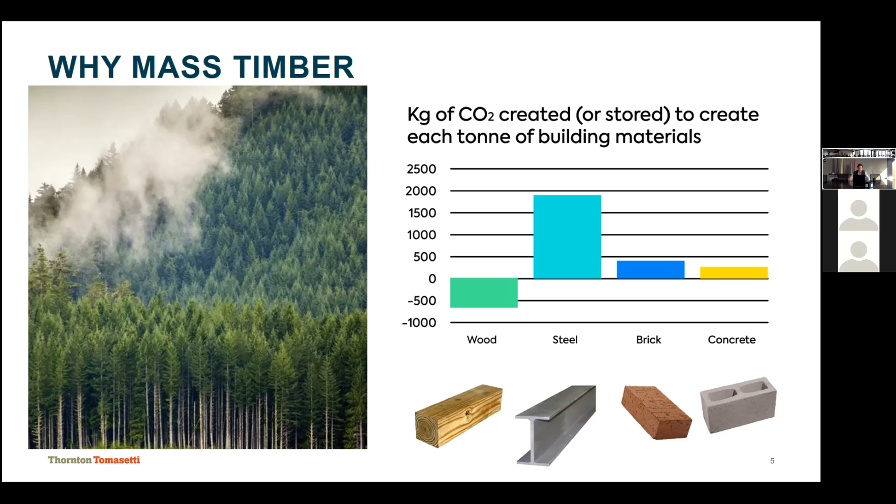So having other materials is always great, but also in the context of meeting the targets that the architecture and construction industry have set ourselves, and trying to reduce the amount of CO2 emissions on the planet. Wood is an incredible material because not only does its fabrication process have smaller emissions than traditional materials such as steel, brick, or concrete, but it actually captures CO2 during construction. And there may be some discussions about when this CO2 is going to be released, but as an industry right now, we have established some very short targets for 2040. So having tools that help us achieve these short-term goals is incredibly important.

Having this as part of the structure is also very important because when you look at the total embodied carbon in a building, about 70% of it is actually embedded in the structure. So if we are able to reduce these very large numbers, that's a huge success.

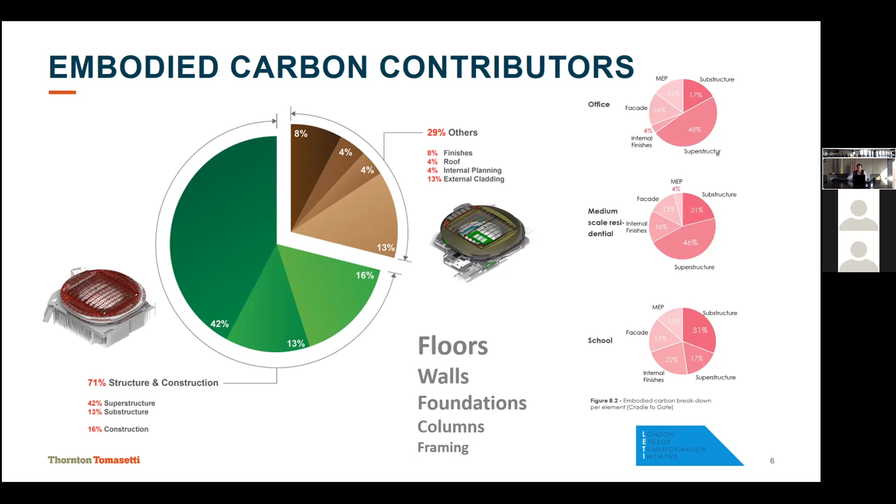Now, just in case you guys are not familiar with mass timber, what I'm talking about here are products that are composed of laminations of different sizes of timber. Traditional timber construction is more like stick framing, which is 2x4s, 2x6s, 2x8s, and they are nailed together to form houses. Now, when we're talking about mass timber, we're actually taking these pieces of timber and gluing them together, nailing them together, or mechanically joining them together to create these bigger pieces.

Now, because we're creating bigger columns, beams, or slabs, the performance of this material is very different from what we're used to in traditional timber construction. And then we can achieve buildings that are bigger than what would be allowed by traditional timber construction.

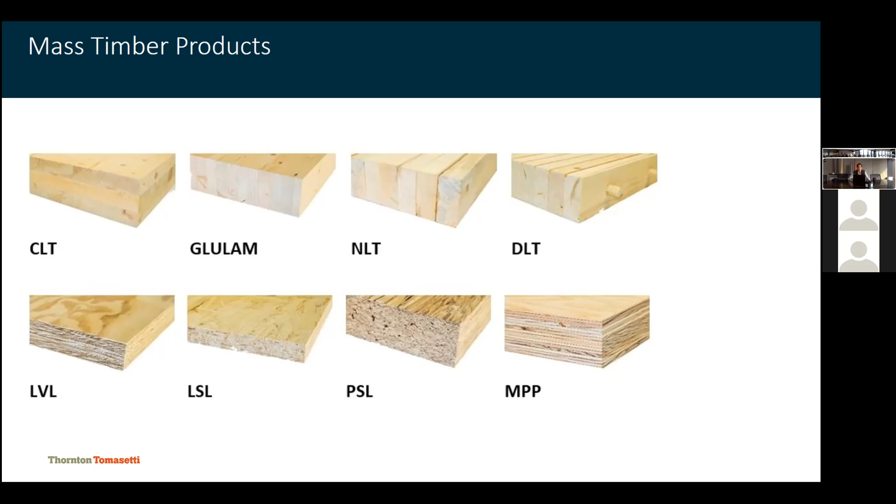Here's an example of how we are building that. It's actually not technically mass timber, but we think it's interesting. This is a Wisconsin manufacturer that harvests full trees and creates the structure out of a single tree member.

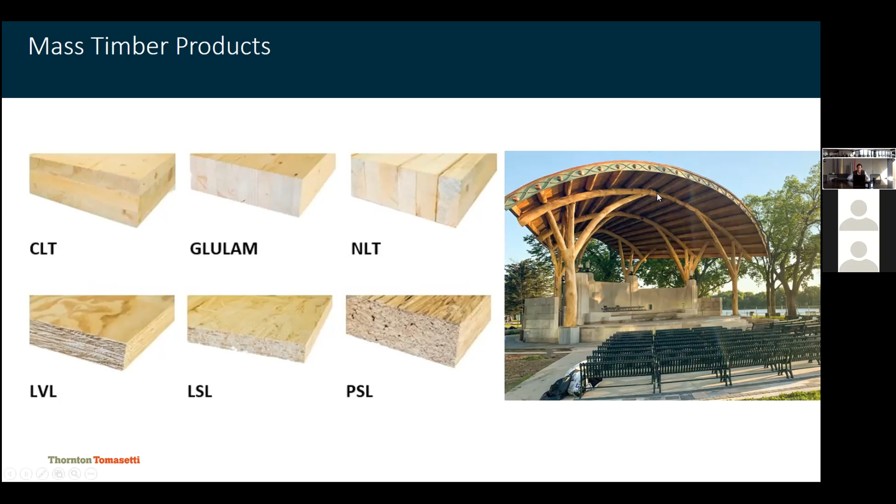Now, mostly today, I'll be showing you images of glulam beams and CLT slabs. Glulam beams or columns, you basically just stack them in one direction, one on top of the other. It's about 1.5 inch laminations, and they are stacked on top of each other.

In the CLT, what we do is we cross them 90 degrees between layers. By doing that you first get like a two-way behavior, but also, wood tends to shrink over time. Wood doesn't shrink too much in the direction of the fibers, but it changes volume more significantly in the direction perpendicular to the fibers. So by creating this secondary layer perpendicular to the main layers, we're able to constrain those movements that are natural in wood.

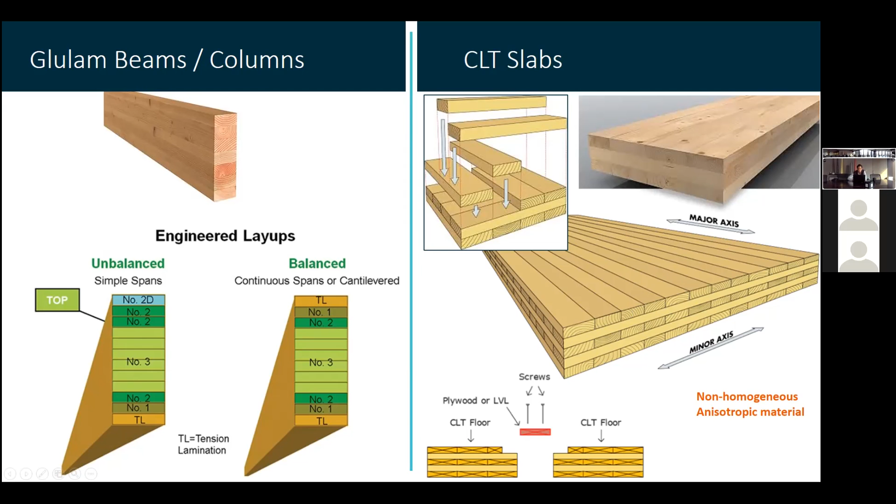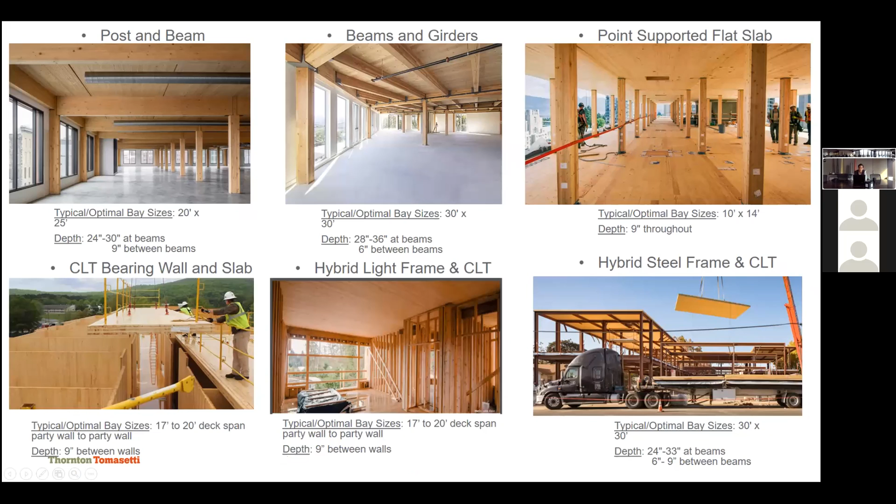And just to show you a few images of what is possible with wood, there are different systems currently being utilized. We have post and beam construction, where you have a glulam column with glulam beams on top, and then the CLT slabs above. You can introduce a girder and just have joists, so your beams are more closely spaced, and the CLT slab becomes smaller. Or you can actually remove all the beams and just have the CLT supported on top of the columns.

Now, when you're doing that, you're gonna end up with columns very closely spaced. So different buildings will require different things. You can also use your CLT not only as floors, but also as walls, and just bear on these CLT walls. This is pretty typical in Europe, perhaps not so much here in the States for now, but you'll see it will happen more and more.

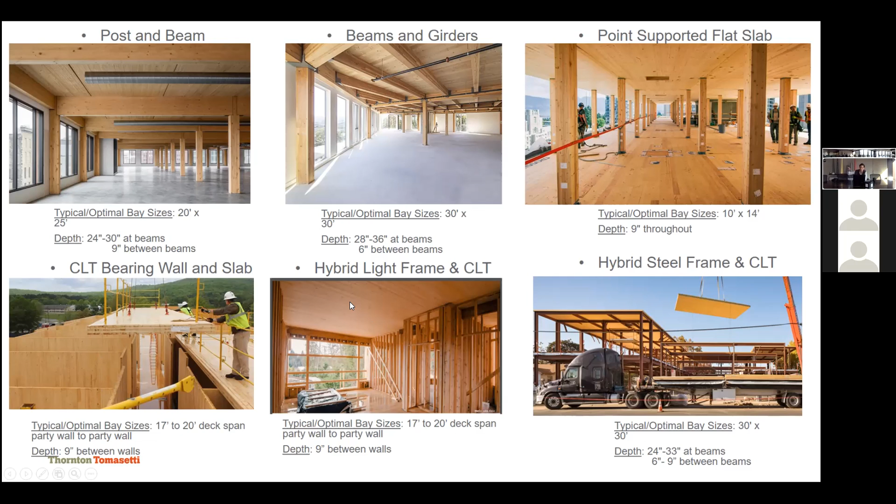And then there is a mix between old and new, which is stick framing. It's using these traditional stick elements, and then just using the CLT for the floors. All this would be concealed in gypsum, but the CLT gets exposed. And now we're seeing a trend, which is mixing materials. You can either mix it with steel or with concrete, and especially as we go into taller buildings, it may start making sense.

Now, the magic thing with timber is that it creates this char layer on the exterior, and the char protects the interior. So in the interior of the element, you keep your structural properties almost untouched. And then all you have to do is understand how long the fire is going to be, or for how long you want your protection to be, and make sure you have enough wood around the structural part that you need for the fire case to sustain the loads. And that's something that is very well known.

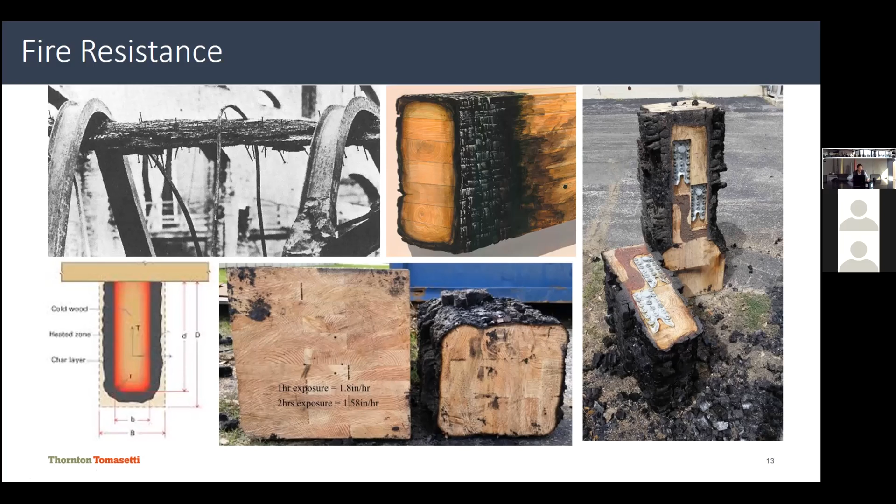So going back to Chicago now, how this became possible. This is going back to 2017, when the tallest mass timber building in the US was 7 stories tall. In Europe, they had taller buildings, probably more in the range of 12, 14 stories at that moment.

And the University of Cambridge had a significant amount of funding, and they were trying to figure out what to use that funding for. So they reached out to a number of architectural and structural companies and asked us to design high-rise mass timber buildings, not with the target of building them, but to explore the possibilities of the material, and most importantly, to identify where the limits of the technology were at the time. So that's why they asked us to design this 800 feet tall, 80-story mass timber building.

Perkins and Will at the time, they were working on the development of all these lots around the river. This is like the south part of Chicago. So we decided, okay, we'll use that site as our case study, and we'll develop this building over there.

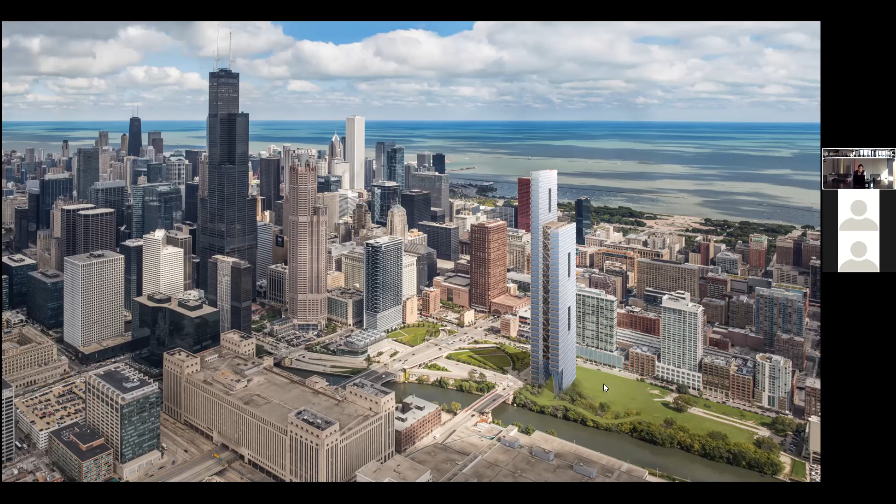Now, to pick a case study, we start with a traditional building where you have a corridor in the center and you have units on both sides. Now, structurally, the most efficient thing you can do is always put the structure on the exterior of the building to resist the wind forces, which is what becomes controlling for a tall building.

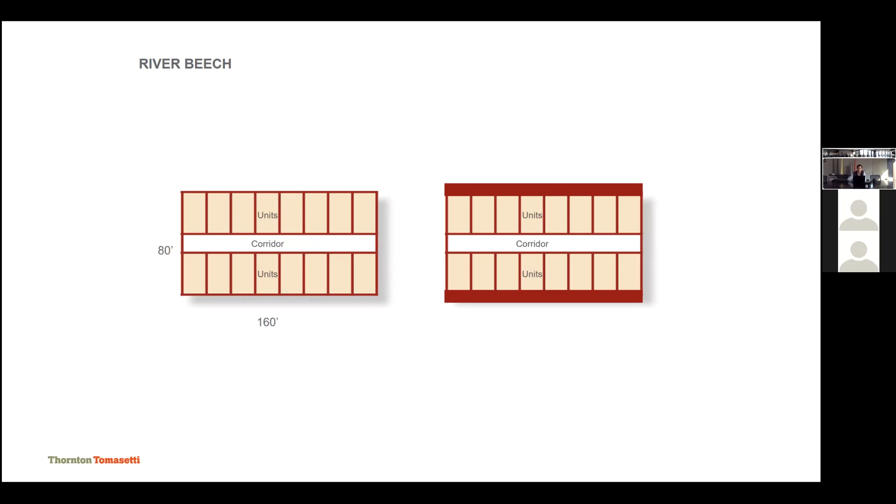So if you're doing a small building, then where your columns are, where your walls are, that's the important part. Once you go into all these very tall buildings, the big concern always is, how am I going to resist all the wind forces? How am I going to resist the seismic forces? We're in Chicago, so actually we don't have significant seismic forces, but as you know, Chicago is the windy city, so wind is a very big concern up here.

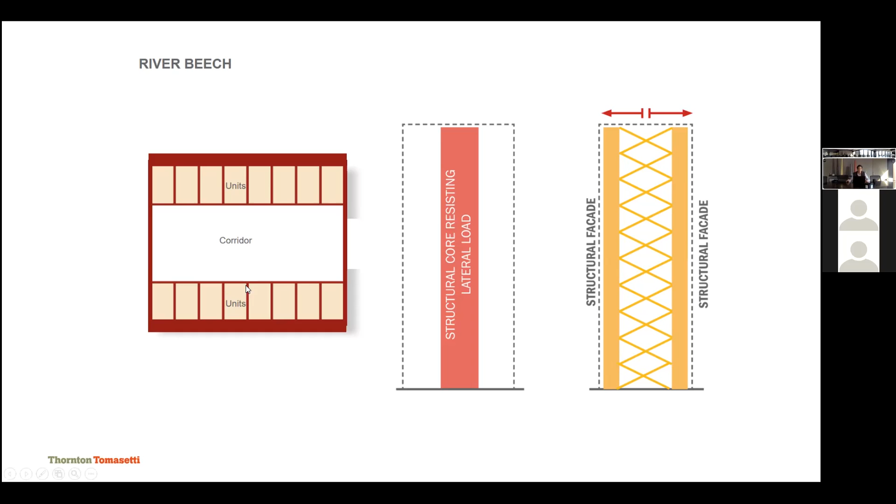So if you're trying to have the most efficient structure, then what you want to do is actually push the building out. So not only did we push the structure to the facade of the building, but we actually split the two units into two different buildings in an aim to gain on the depth of our system and make it more efficient. Then at that point, we had kind of like a diagram system.

We were discussing with the architect, okay, architecture, you want to maximize the views, you want to create very rectangular openings. However, for forces, it's hard to flow around a corner. And when designing with a material, it's very important to understand how the material works better. Wood connections are very easy to do when you're trying to do axial forces, when you're trying to push one piece against the other. But it's much harder when you're trying to transfer bending through the connection.

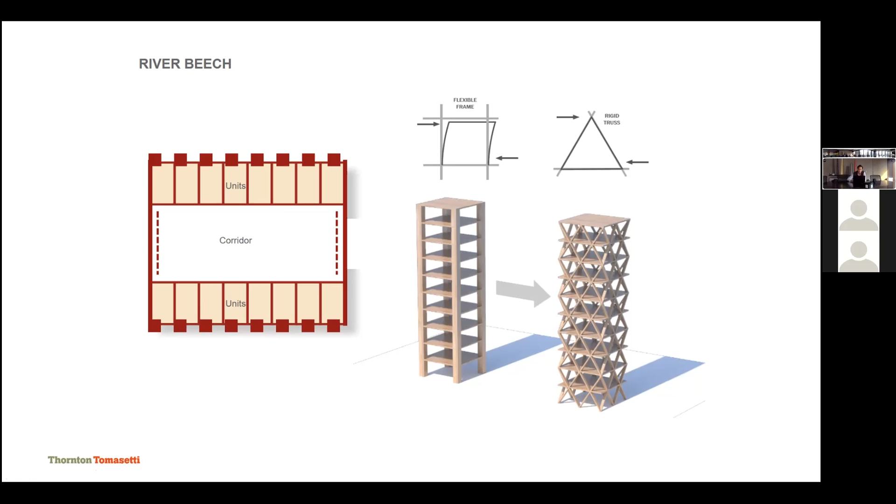So what we did is we actually diagonalized all our diagrid to simplify our connections, and we have a much more efficient structure. And through multiple iterations, we ended up with the building on the right, which had 2 towers with a diagrid on the facades. The diagrid was conceived as LVL, laminated veneer lumber. So basically, you peel a trunk and you glue the laminations to each other, and then each of the 2 bars of the building was joined by a glulam diagrid in the middle.

So at the end, you can imagine this building bending, and when it bends, the diagrid gets engaged and transfers the forces from one building to the other, creating a very efficient structure. Now, the other thing that the diagrid gave us: wood is a great material, but compared with steel or concrete, its capacity is smaller. So once you go into a very tall building, you may end up with very large column sizes.

Now, by creating this diagrid, we were able to distribute all that area that we needed to support the building into many different members. So each of these becomes like a smaller column that in total becomes a large area of wood, but it doesn't have a big impact on the architecture of the building.

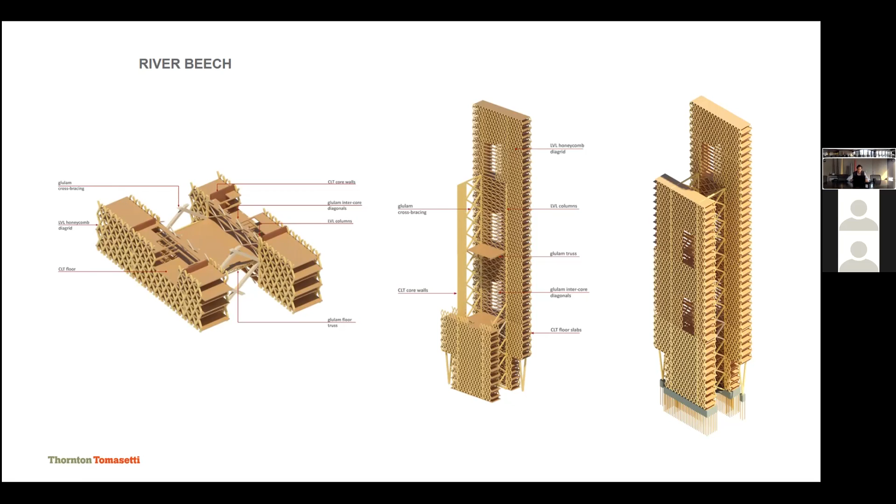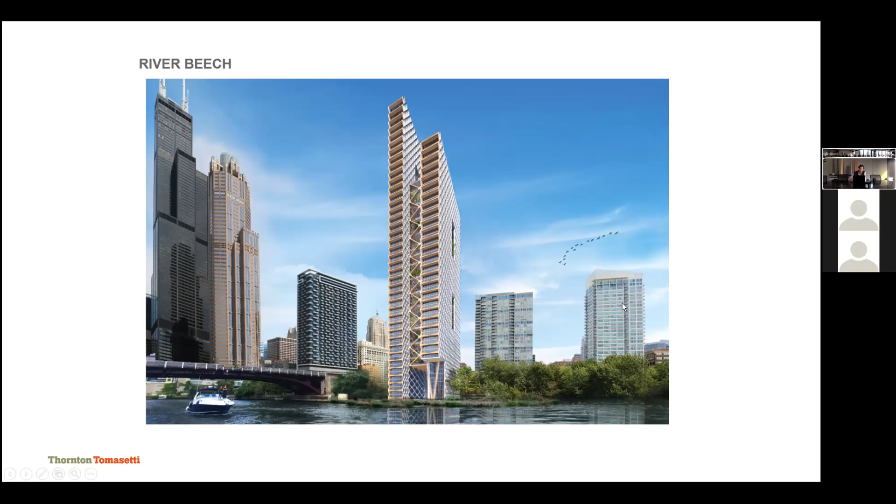So if I give you some architectural renders from Perkins and Will, you can see here the 2 buildings with that intermediate space. Now, what that intermediate space allowed us was to create a great atrium for public functions. You can see the diagrid view from below with some intermediate spaces. That's another advantage of the diagrid: because you have all these members, you can start creating openings, because the diagrid will just transfer the forces around it through all the members.

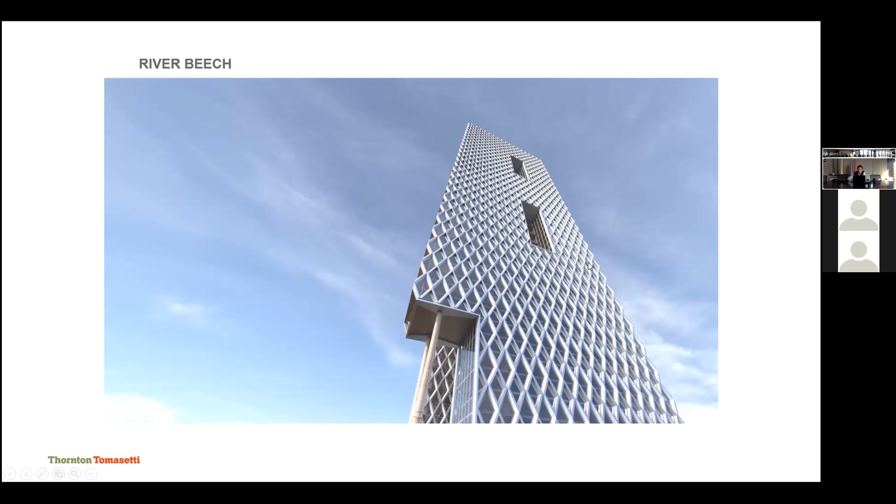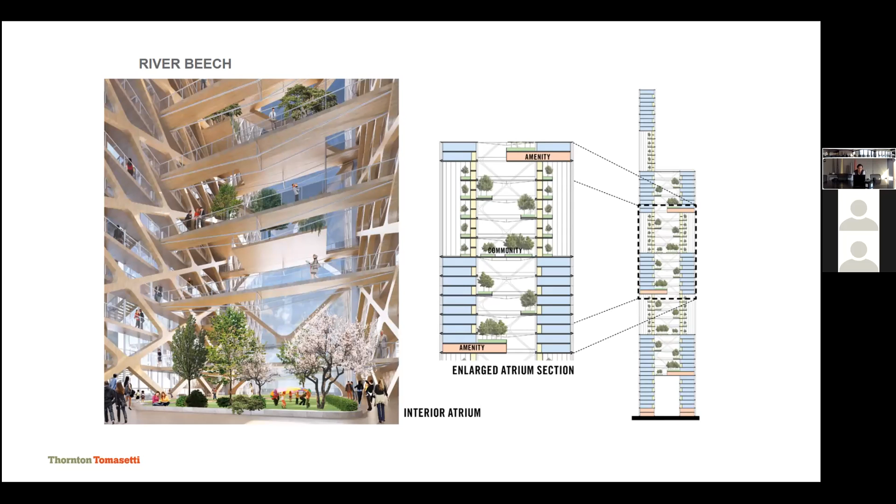And here are these atriums that were created in the interior, and you can see the beauty of these atriums, having the wood exposed. It really creates a very unique space, very different from what we're used to.

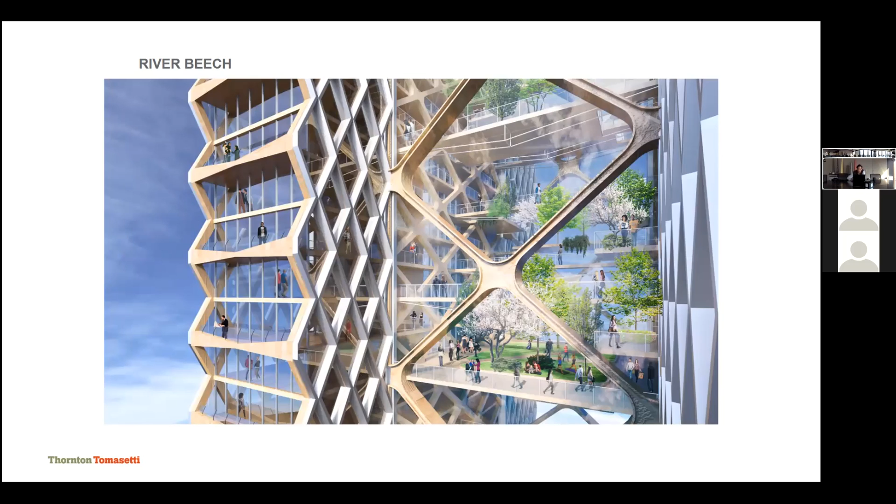Another image of the atrium, and then the spaces within the unit, and this idea that you really feel in a natural environment. I don't know if you guys have had a chance to walk into a mass timber building, but one very common reaction when you go into a mass timber building is the first thing you want to do is touch a column, touch a wall, whatever you can to experience this member, this environment, and it's very unique.

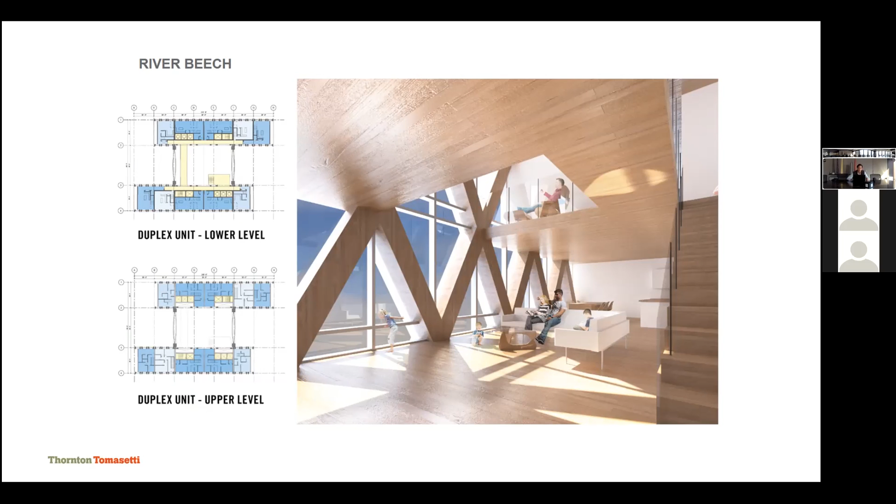So you see some more images. Now, the other advantage of mass timber is it allows for a lot of prefabrication, and its weight is 1/3 of the weight of concrete. So you can prefabricate much larger elements. So one key thing of this project also was to define how these modules were going to be fabricated offsite, and how they were going to be brought into the tower.

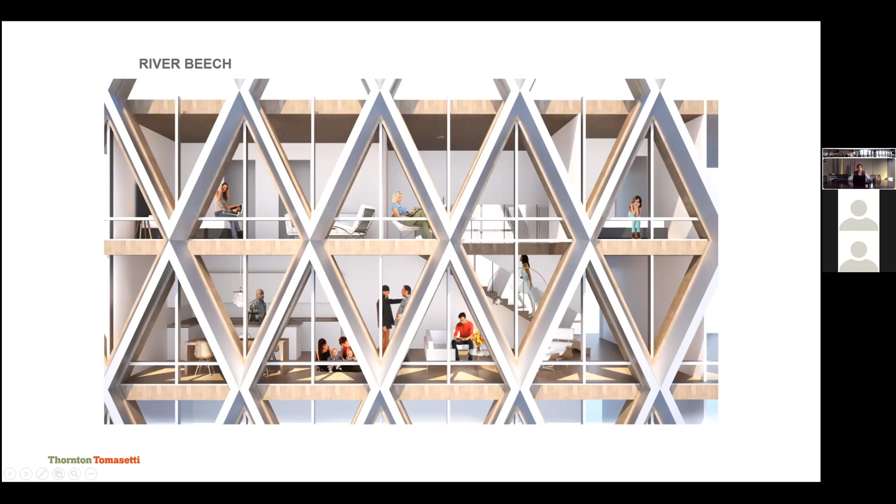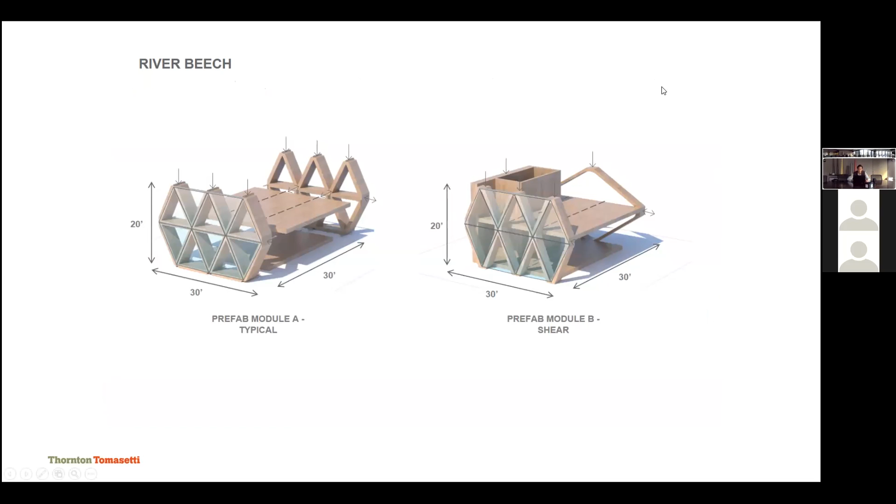So if you can imagine one of these units, it's probably built out of 2 different modules, and then each of the modules is fabricated outside of Chicago. It's brought in a barge, so a very efficient transport system. And because we were next to the river, these pieces could be picked and then dropped into the building. So, in a nutshell, that was the River Beech project.

Now, what I wanted to take the opportunity to show you too is what that allowed us, because back in 2017 we published in the CTBUH journal the results of this research, and it went into ArchDaily and a lot of publications. It had a lot of noise. I was actually very surprised, we started getting people asking for interviews, because it was a research project. But what I realized at the time is this project showcased the possibilities of mass timber.

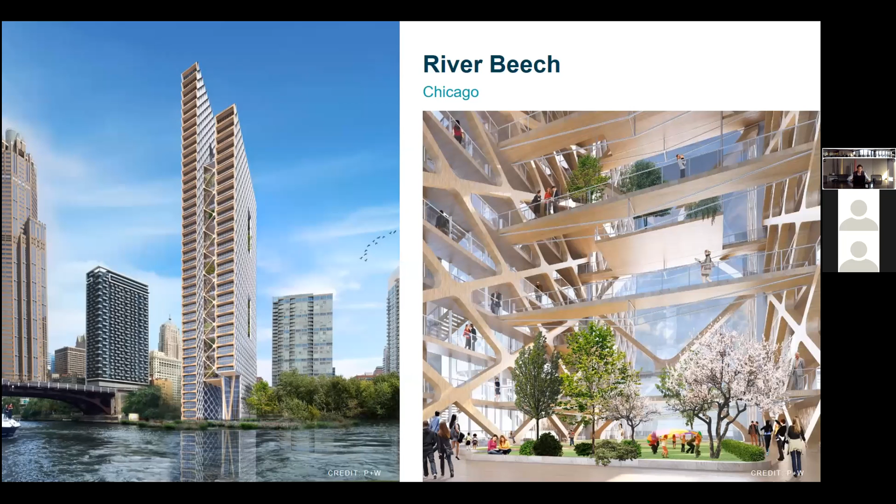Now, about 2 hours north of Chicago is Milwaukee. In Milwaukee, there was this developer, a self-made developer, an immigrant himself, who built his own company, started as a painter, and now he's building all these buildings in Milwaukee. They owned a plot of land in downtown Milwaukee where they had tried to build a 35-story tower. They had the zoning approved, everything was going great, but they couldn't make the numbers work. Even though in Milwaukee concrete is actually very cheap, the numbers wouldn't work. They couldn't figure out how they were gonna sell this building.

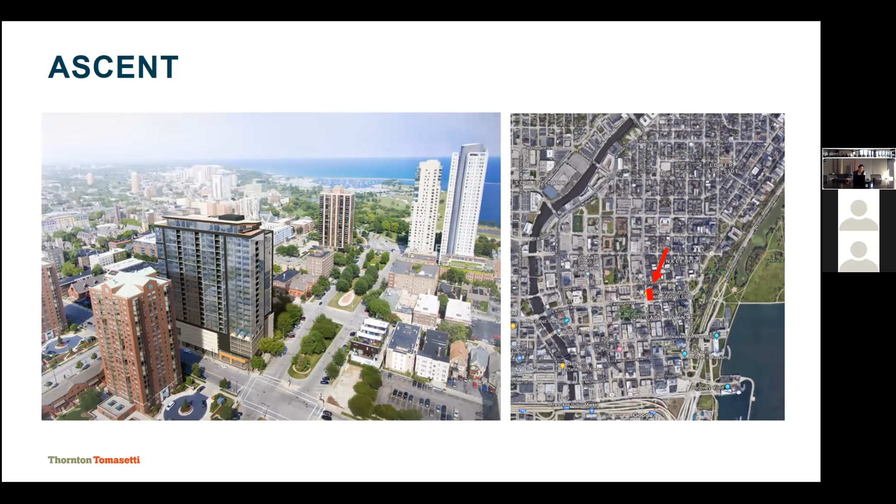Now, when they saw what we were doing in Chicago with River Beech, they called us and said, hey, could we do something, maybe not as crazy, but something similar here? At the time, they wanted to do an 18-story building. So as you can imagine, we were like, yeah, absolutely, let's do it. And this is how Ascent started. Today, Ascent is actually a 25-story building. It grew over the design process and gained an extra 7 stories. But it's currently the tallest mass timber building in the world.

It consists of a concrete podium, which is parking, with a mass timber residential building above, and then an amenity area on the top of the building. And you may say, okay, yeah, but you're using concrete. Well, you want to use the right material for the right place. For the parking, we're in Milwaukee, we have heavy snow, we have all the de-icing salts. You don't really want all the salts in your timber, and you don't want the cars rolling on top of all that. So the podium is concrete, and then once we transition into the residential area, that's where we go into the mass timber.

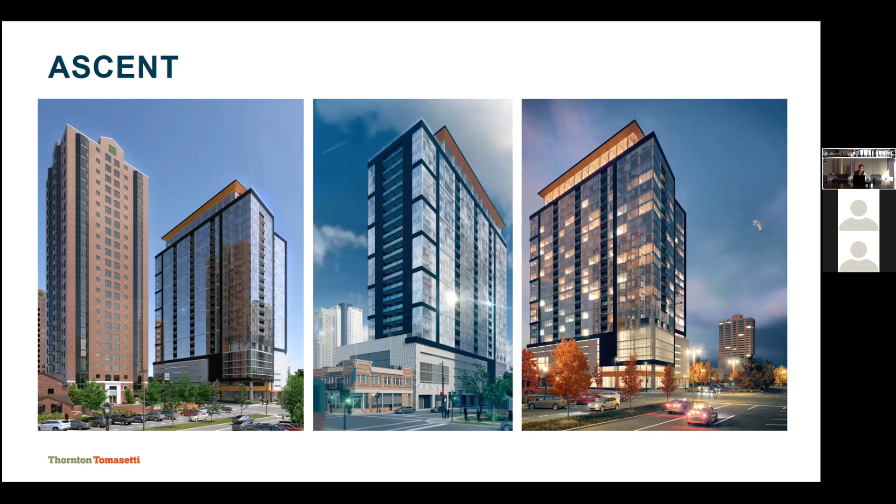Would you let us do it? And one of the ways we had to convince the city was to tell them, okay, we're gonna do all the columns and the slabs in timber, but we're gonna keep the cores built in concrete. So the lateral system of the building will be these 2 cores.

You will have all your egress stairs and communication path for both evacuation of the building and for the firefighters to get into the building. And all these areas of safety are enclosed in concrete, which is a very well-known material for which we know the performance.

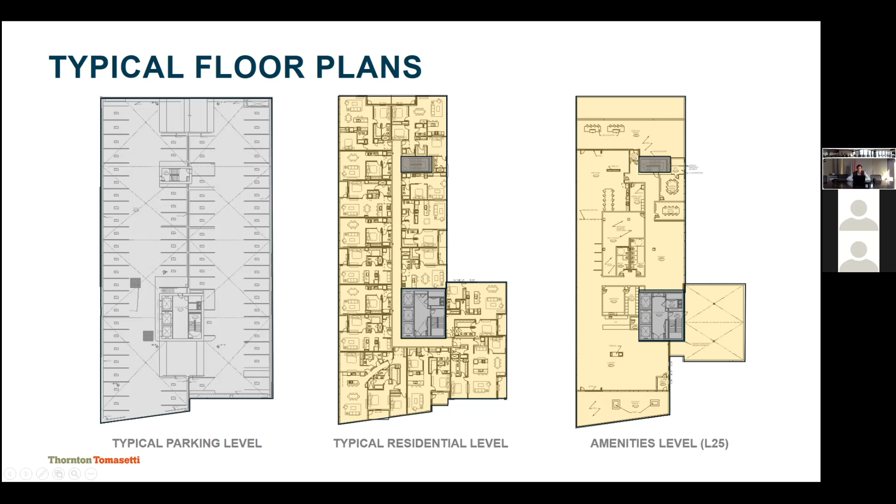And finally, on this slide, just the top of the building. This is branded as a luxury building, so they have very top-notch amenities on the top of the building. And here are some images of what the building is going to become. And I'll show you some images of construction at the end.

So the gypsum, the plaster boards, were protecting the structural elements. But the owner told us, look, if I'm gonna cover my timber, there is no sense. So making sure all the timber was exposed was very important for this project.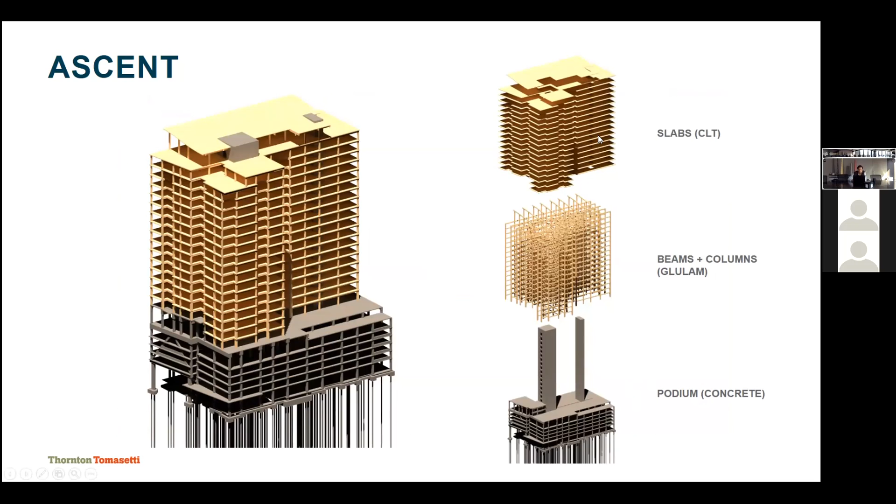So here you can see a summary of the structure, and you can see the podium with the two cores, and then a grid of glulam beams and columns, and then the CLT slabs. And if we look at the typical floor, you can see the beams, the typical span north-south. We have some secondary framing for some balconies over here, but most of the beams span north-south, and then the CLT spans perpendicular to these beams.

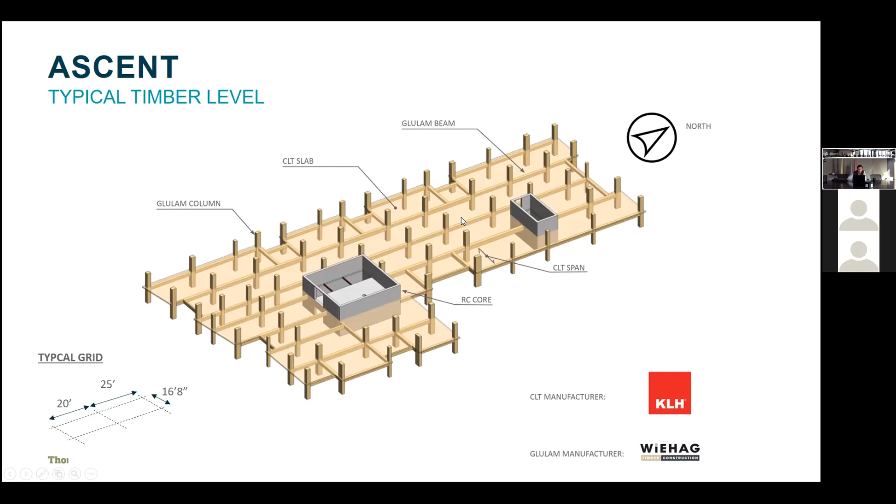And this is something interesting and good to know: with timber you can do long spans, but because timber is a softer material, it has more deflections. So if you want to do a longer element, you require very big members. So in order to keep the floor to floor at a very reasonable number, we kept the columns fairly closely spaced. These columns are 20 to 25 feet of spacing in the north-south direction, about 16.5 to 20 feet in the east-west direction. So you end up with a fairly dense grid of columns.

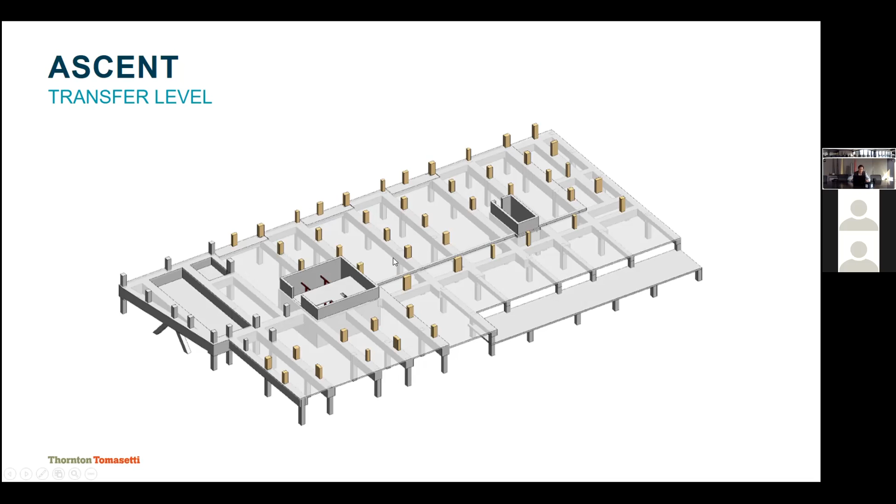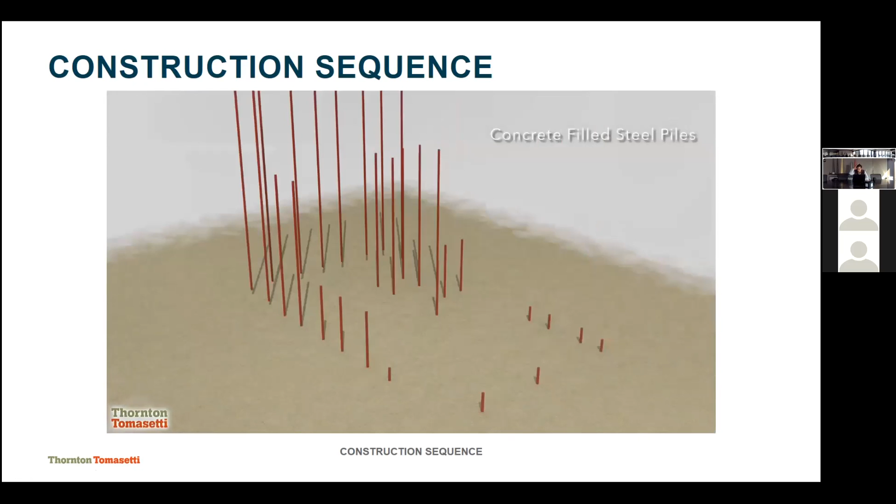And hopefully this goes okay in your computers. But here you can see a quick animation of the building, and what you're going to see is the construction. In Milwaukee, we have to go with very deep foundations. We start building the concrete podium first. And then once we get to the top of the podium, we have this transfer area with these PT beams.

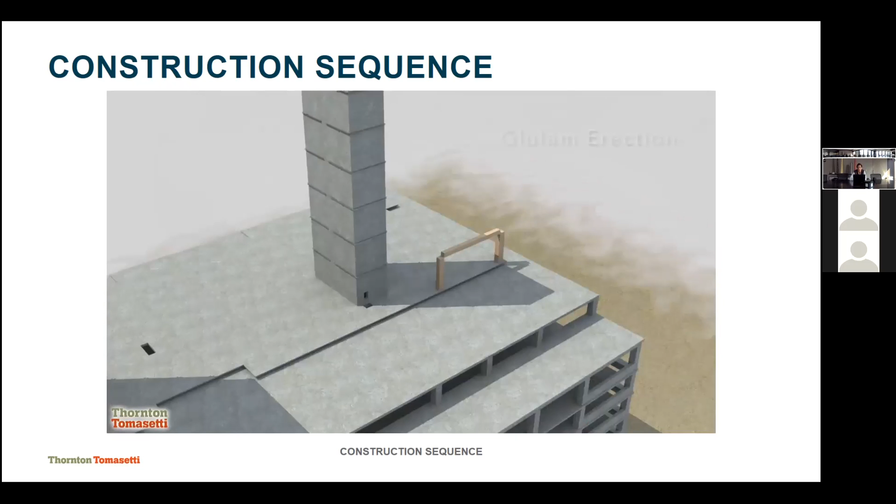And then once that was finished, we start bringing all the glulam. So you have all the glulam columns and beams. And as the beams and columns are erected, we start dropping the CLT floors. And it's literally that. We just drop the floors. And then the construction continues.

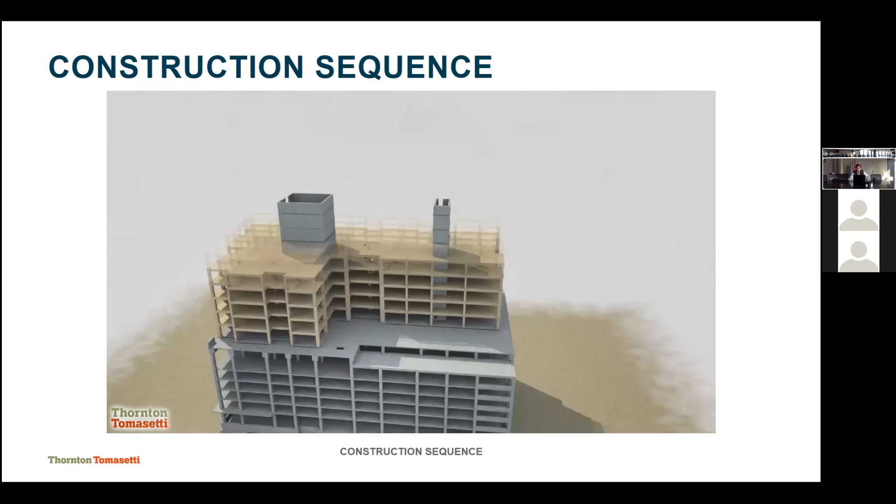And back in December of 2021, we topped out the building, and right now the whole structure is finished. They are progressing with the facade, which is almost at the top, and they are progressing with all the interiors.

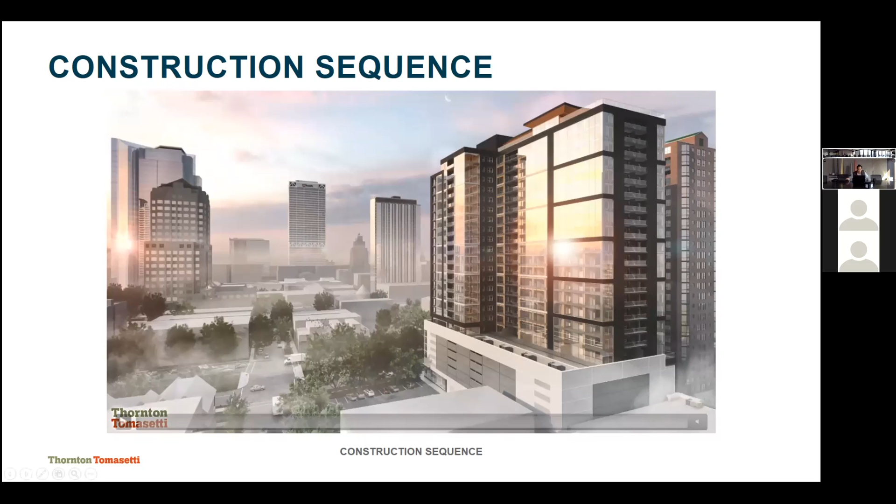So we did this whenever we had bathrooms, kitchens, or areas where we wanted to conceal the timber in gypsum to protect it from water or from grease or from other damages. So that actually is interesting. About 50% of the building ends up being encapsulated in gypsum, not for structural reasons, but just because the use of the building requires encapsulating this timber.

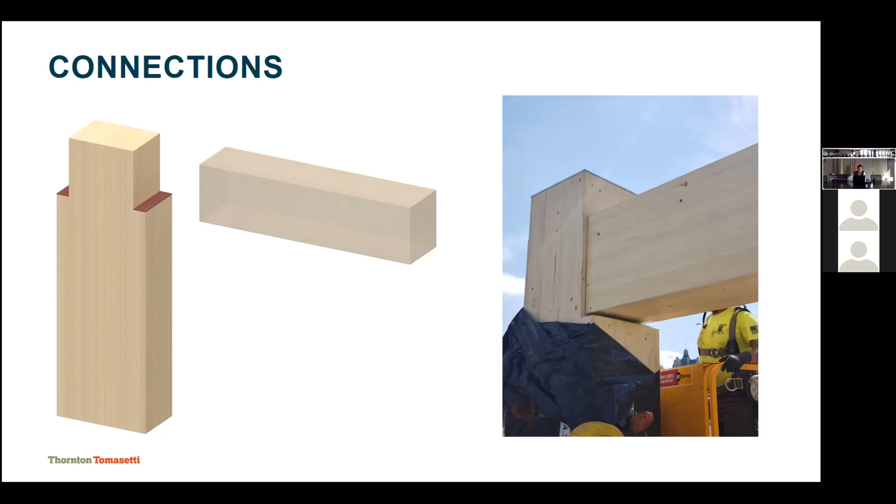Now, where we were able to explore the connections, we use this connection. It's just a simple steel angle that gets screwed into the column, and then the beam. You can almost see it here. It's notched, so you just drop the beam on top of the steel angle, and then at the bottom we introduce a block after the fact to close the connection, and at that point all this steel connection becomes completely wrapped

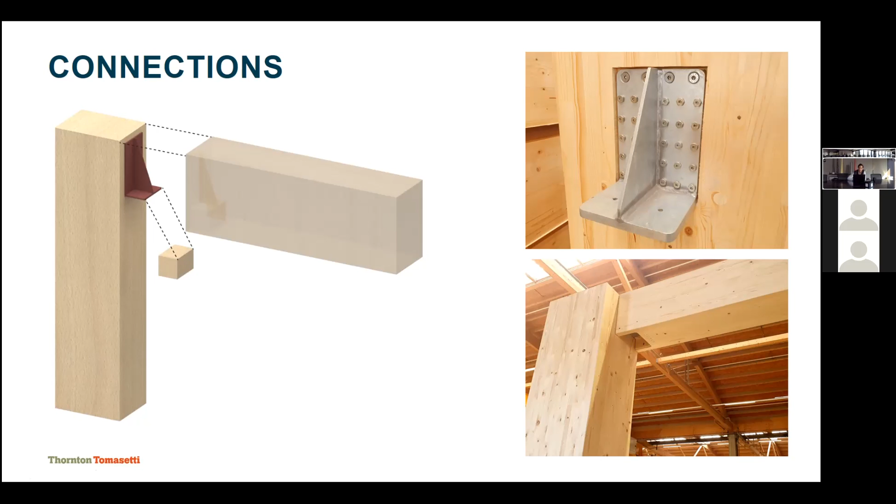in wood. So what we're doing is we're protecting the steel with wood, and we design based on that char layer that we mentioned earlier. That's the fire protection of this connection.

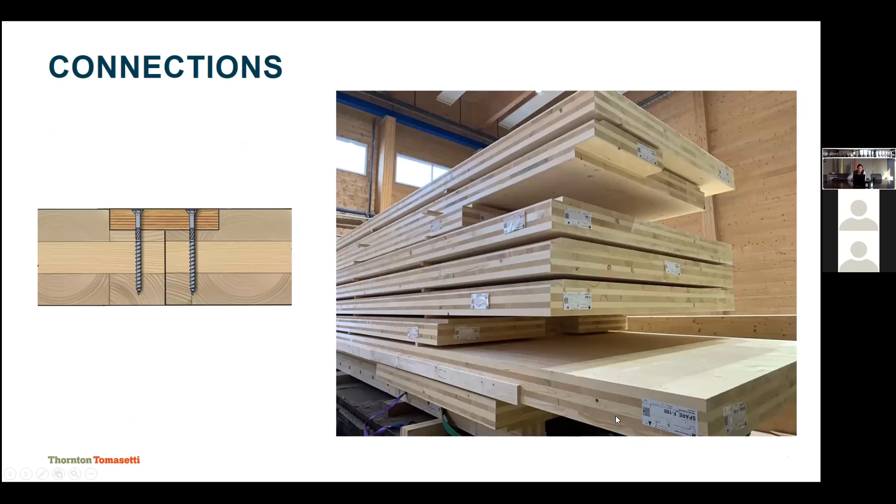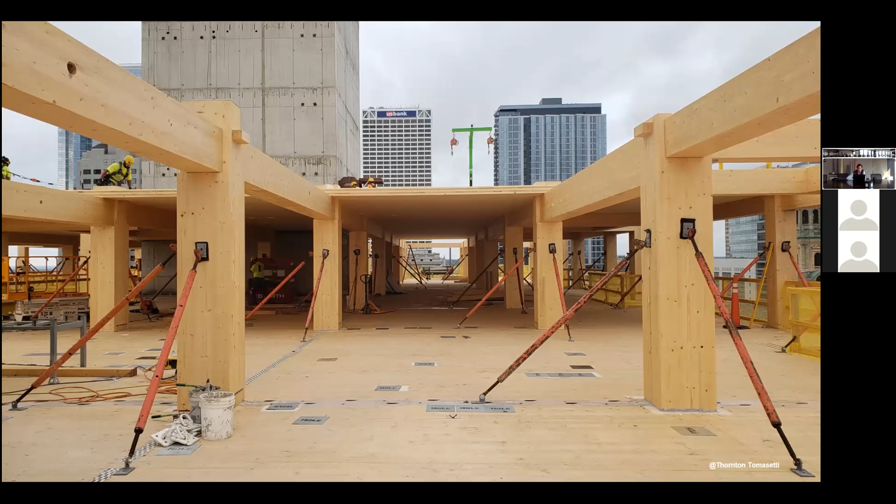Here you can see how these CLT panels are hung. What they do is they put some temporary connections at the top of the panel, then they just hang it and drop it in place. The crew is very limited. It's a crew of about 10 people working on the timber areas of this building, and they are able to erect 1 floor per week, which is very quick. The workers love it because it's a very clean construction technique.

They don't have to get dirty with concrete. They don't have to be carrying heavy reinforcement bars. So they actually love it, and it's also a very clean site. You can see here we didn't clean the floor for this picture. There is not that much extra material. All you get here is some dust from the timber if any cuts need to be made, but everything is pre-engineered. So all the cuts come from the factory.

Even the penetrations for the MEP come pre-drilled from the factory. So all they have to do is just enter one piece into the other, and that's it. Here you can see some of these hangers for the CLT. This is what they put on top of the CLT. And then here you see all the holes for the MEP.

Now, one thing that is very important with a mass timber building is to be able to seal it. As you can see, nothing is protecting the timber. So if it rains, the timber gets wet, which is fine. But you want to make sure that you seal the joints very well, so if there is water, the water only stains the top of the panel.

And something maybe I haven't mentioned yet is that these 7-inch CLT panels are covered by a 2-inch gypcrete topping. The gypcrete is like a cheap concrete. So even if the water stains the top of the panel, it doesn't matter because it's all going to get covered with this topping.

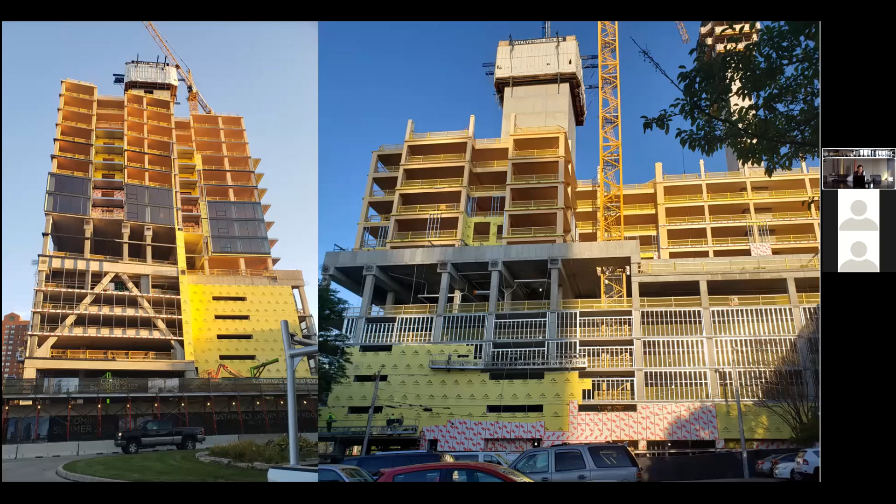And then these are some pictures from a few months ago, also during construction. You see that at this point, the concrete was already erected. And then they were starting to assemble the facade on the exterior, and all the mass timber was going up.

And that's what I had for you guys today. I could keep talking about this for a very, very long time, but I wanted to give you guys some time to chat and discuss.

Chichis, I see you have your hand up. Yeah. So what about the durability and life cycle cost of the buildings built by using mass timber technology? Durability in terms of lifespan. Sorry, are you asking about the lifespan of these buildings? Yeah, durability in terms of lifespan. Yeah. So,

this is a great question. And one thing that, when we are asked this question, I always think about old churches or all these Chinese pagodas that have stood there for hundreds and hundreds of years. So the timber actually doesn't behave very badly if you keep the humidity or the water out of it. It behaves very well. What really damages timber is if you wet it and then you dry it and you wet it again, that becomes an issue.